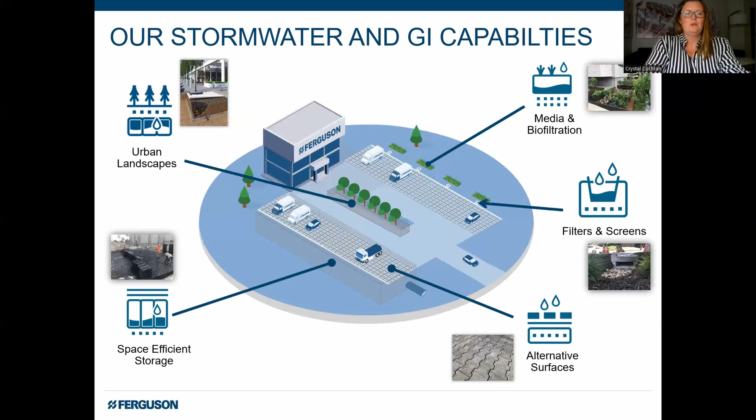And then, of course, a very popular space efficient storage category. My boss asks all the time, where does your rain go? And it's really this weird little question, but if you think about it, all of our stormwater projects essentially are summed up with this question. So we are going to take a look also at space efficient storage and how we can store some rainwater without creating future maintenance issues for us.

My team at Ferguson spends a great deal of time with specifiers from both the private and public sectors. And really, it doesn't matter which side of the table you're sitting on. The very first question that everybody asks is, how much is this project going to cost me? The second question, without fail, what will it take to maintain it? The days of specifying solutions that we can set and forget don't exist anymore. They are long gone. Now, maintenance is an expected part of these projects.

Working with municipalities, contractors, civil engineers, landscape architects, manufacturers, even environmental organizations across the country has really given our team a unique ability to truly learn about the various needs of these different cities and how to meet those needs. And it really does give you a unique perspective on the different BMPs that are out there, the ones that are best suited for which area, geographically.

But then, of course, the answer would change depending on that city's ability to maintain that BMP, right? Some cities have more resources or more tools available to them. And if that's the case, for the cities with less, you would maybe recommend a different green infrastructure BMP so that it could continue to function properly for the life of the project.

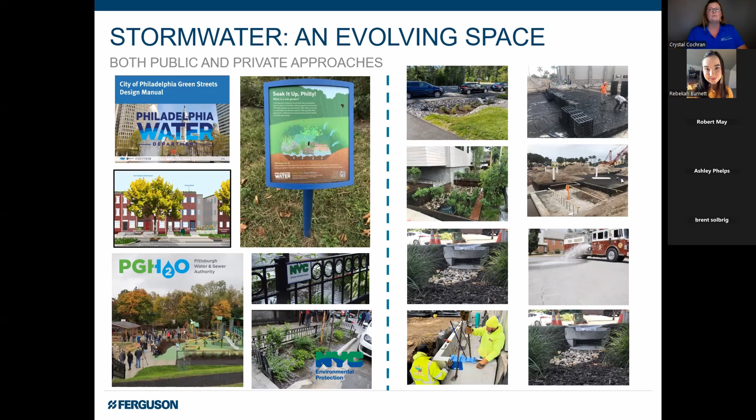It's really important for you guys to lean on your resources. Many companies now, Ferguson included, offer design assistance to you at no cost. When you ask for help with your projects, they're happy to help make recommendations. And I really encourage you to use these services. Not only does it save you a lot of time and money, but it really helps to ensure that somebody that has been out there, that has seen all these projects go in, that has seen the beautiful outcomes, the horror stories and everything in between, learns from those past projects, brings it to the table, and makes your project as successful as possible.

This is usually a lot more than just a, hey, what can I use here? Or a quick email. These are resources that will save a significant amount of time. We're talking sending back not only the proper recommendation, but layouts, CAD details, spec sheets for most of the products. And sometimes it even includes pricing to help make sure your project is in budget.

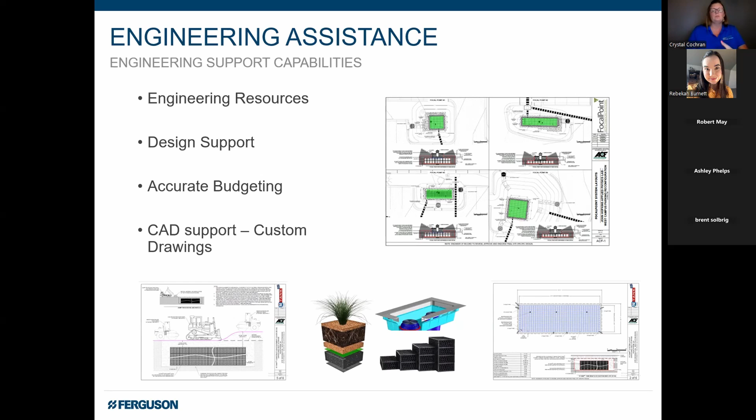So you covered the BMP design, right? Now, what's the most important part? Now you have to make sure that the resources that we're all too happy to help you guys put the BMPs on your plans are going to show up to the job site. Make sure that the lowest bidder on the job doesn't save a few bucks by bringing in dirty stone, or maybe the new guy doesn't forget to install the inspection ports on your subsurface storage system.

Job site support is equally as important as design support. Ask for it, require it. If someone's helping you to specify a product, make sure they're going to help you with the install too. The installation of BMPs, it's a crucial step in the process. Anything installed incorrectly is more than likely going to need to be repaired or replaced really quickly, which is, of course, time and money not very well spent.

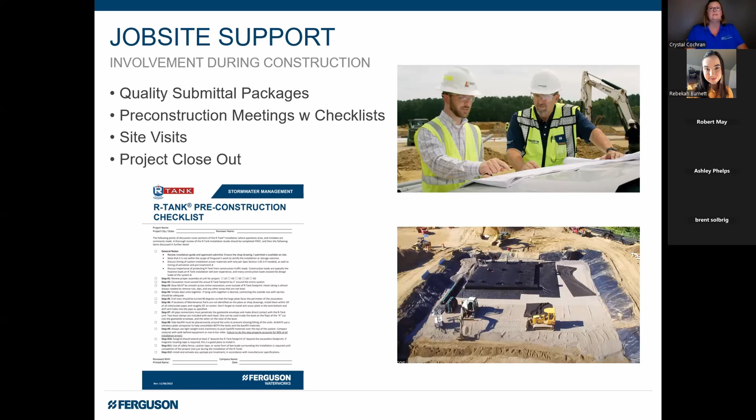Many companies and organizations provide support that's unique to municipalities. Again, Ferguson is included in that. Sometimes this looks like helping your team design a new GI project, every year we're going to design something new to help our city meet their green infrastructure goals. We would love to help with that. There's a lot of organizations out there right now that would love to help make sure you're implementing the right assets for your goals. Other times it's collaborating on an already existing green stormwater project.

Maybe it's not performing as well as you'd hoped. And again, many of your local stormwater solutions providers can really help take a lot of that burden off of you, save a lot of Google time, right? Reach out to them and allow them to assist you.

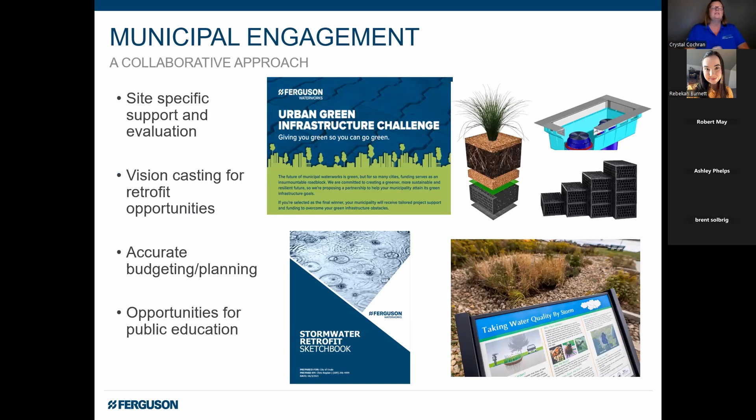Green stormwater infrastructure is a phrase that we're hearing a lot more often all over the country, some states more than others, but just the same, everybody is at least aware that it exists. This is so much more today than just a pocket of green people, right? It is not just like me hugging a tree and saving a turtle and not letting my kids use straws. This is more than that. This is a way where we are designing as naturally as possible. We're allowing developers to build that new shopping mall without directing more untreated stormwater to your drains. Maybe instead you're refilling an aquifer a little bit quicker.

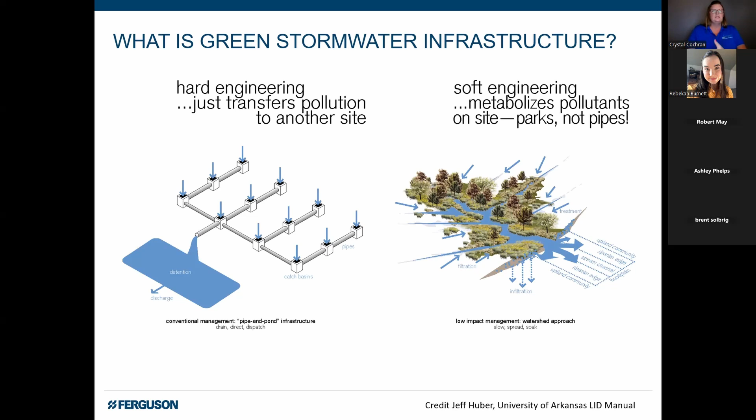So now that you start to see a need for green infrastructure, and some even have requirements, right? I know a lot of cities across the country have actual requirements for a lot of these things. You start to hear all the naysayers, right? Why is this a bad idea? People on your design team, the owners, the city you're building in, whoever, they're going to start to list the many, many reasons why green infrastructure is such a bad idea that you should be scared, right?

There's always going to be the concern that the project's going to cost too much. The repairs are going to be too expensive. This is going to be a concern no matter what you're designing. It does not matter if it incorporates GI solutions or not, but the maintenance aspect of it, of course, brings its own unique challenges. Many people worry that these BMPs will be too difficult or expensive to maintain, rendering them virtually ineffective in the long run.

I have terrible news for every person in attendance right now. No matter what you do, it is going to cost money. And every single thing that you implement is going to need to be maintained. I don't care what it is, right? So with the right experience and keeping maintenance in mind, you can absolutely create an effective design that will provide stormwater solutions with BMPs that will be simple to maintain, and not just by people that have been using green infrastructure for a long time, but by even inexperienced maintenance crews and the people with limited equipment.

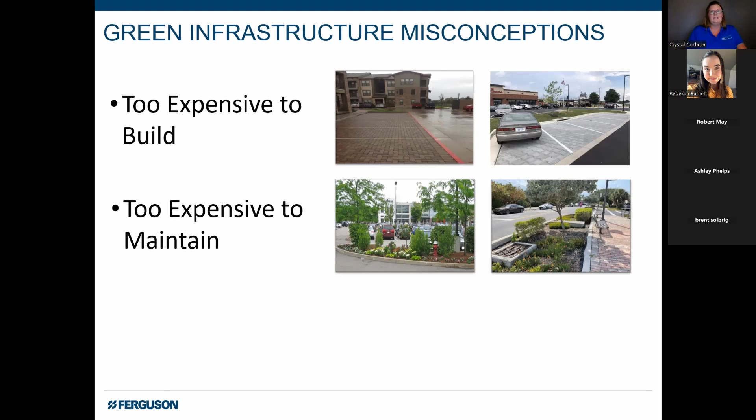This is one of the reasons why green infrastructure is so important. If you're in an area with less development, then only about 10% of your stormwater is running off. That is a much more manageable number. It leads to cleaner water, cooler temperatures. It has a lot fewer problems related to their stormwater.

But if you're in an area that's more developed, like a lot of us, right? Like I live in San Antonio, the people that are living in Houston, Dallas, New York, whatever. If you're in a heavily developed urban area, about 55% of your stormwater is running off. This increase, it's a substantial difference in the stormwater solutions that you're needing to provide. It makes the focus on stormwater in your space a much more serious conversation. At this point, you're not just looking at flooding, which is already important, but you're focusing on the many issues that we see that come along with the runoff.

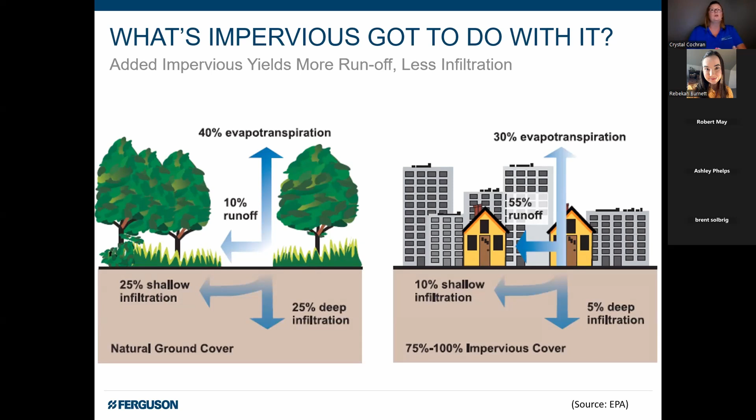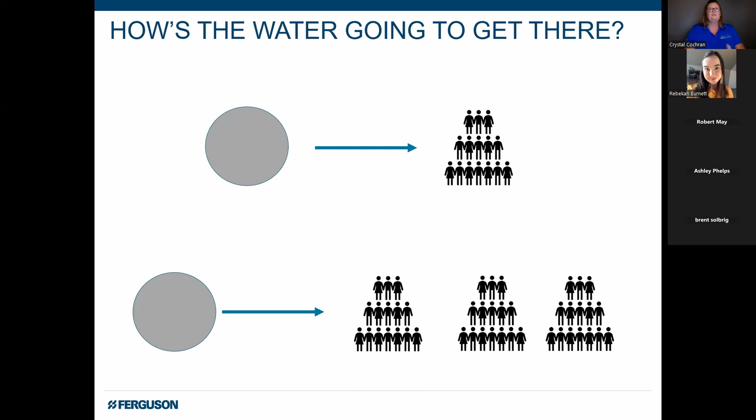We work on projects all the time that had one small area of development and infrastructure, and that space was designed to work for areas that were whatever the population was expected to be at that time, right? Many years and a lot of growth later, the systems in our more heavily populated areas are maxed out. This creates a further need to focus on green stormwater solutions, especially in these spaces.

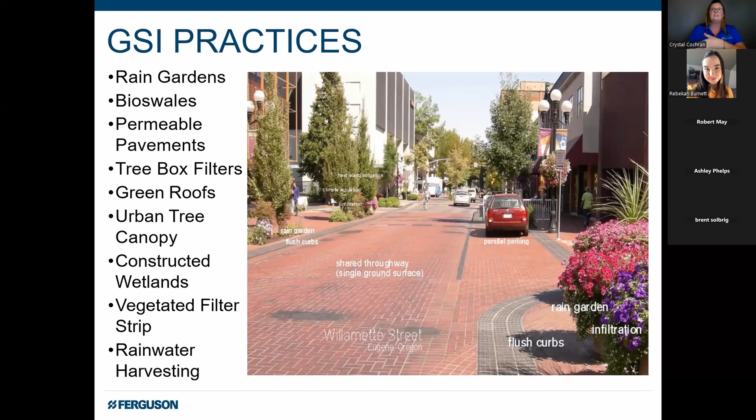Fortunately, by incorporating some of these green stormwater infrastructure BMPs, which are commonly associated with stormwater projects across the country, you are able to help mitigate some of these issues, right? Many of these have been implemented nationwide for years now. This allows specifiers, manufacturers, and municipalities to learn what works best in each of their respective spaces, and it also gives you an idea of what it takes to maintain these solutions in the long term.

When it comes to designing any project, everybody's needs are a little bit different. The municipality's focus is, of course, a little different than, let's say, the developer's. Municipalities are worried about mitigating flooding first and foremost. When storms in any given city are severe enough to cause damage to local businesses, residences, and existing infrastructure, it creates substantial losses for a multitude of people. So flooding is always, thankfully, a top priority for municipalities, counties, and parishes.

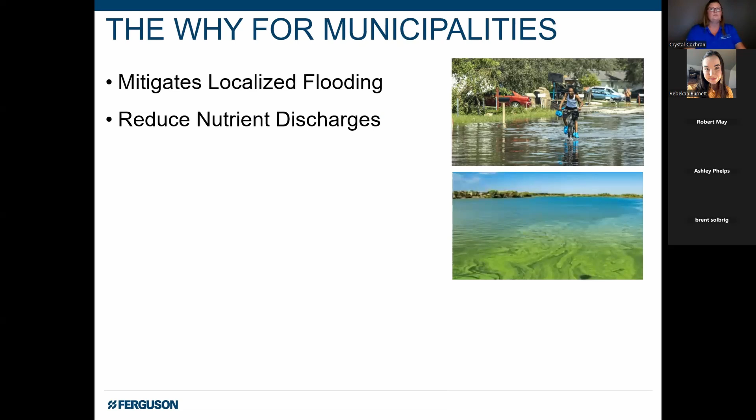Reducing nutrients and other pollutants in the water has become an increasing goal for a lot of the municipalities we work with. Another area where mainly municipalities are concerned is recharging the aquifers. Keeping stormwater on site solves many challenges associated with runoff, including ensuring that our town has water to use in the coming months. In addition, for the areas focusing on treating stormwater, implementing GSI solutions means that you are able to remove a lot of those pollutants on site instead of sending them down to be treated or worried about later.

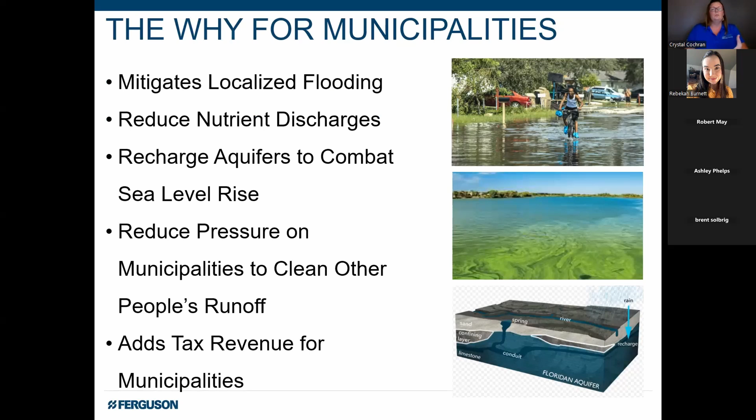Another reason the municipality's focus is a little different than a developer's is that when you're able to use that land for something more than stormwater detention, it's going to add tax revenue for the city, right? Let's put up a school, a park, a dog park, a grocery store, whatever it is, that's better than a detention pond.

The private developer is looking to find ways to meet the requirements of the city they're in without spending any money that's not absolutely necessary. A lot of cities now are offering GSI credits for developers, and they're looking to capitalize on that, right? What incentives can they get to develop in your space? They're trying to do the best they can with the sites that are available to them, and sometimes that means really unfavorable conditions.

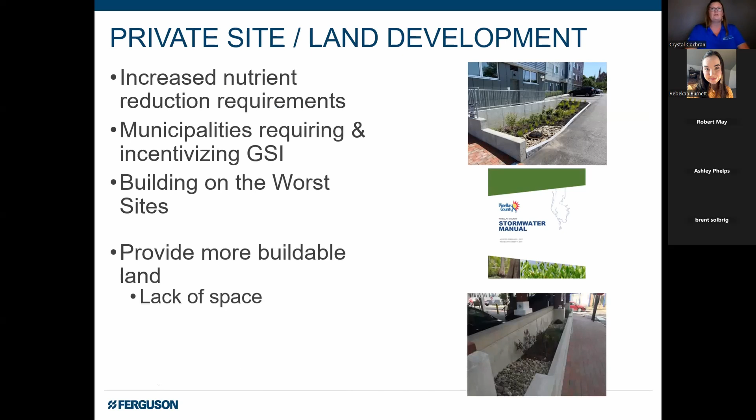And public perception matters to the developer, right? They want people to buy their product, their apartment complex, whatever it is. People want to live in areas that are well kept, that are beautiful, that are not going to flood. And if somewhere in there they're able to care for natural resources as well, it's of course a huge bonus.

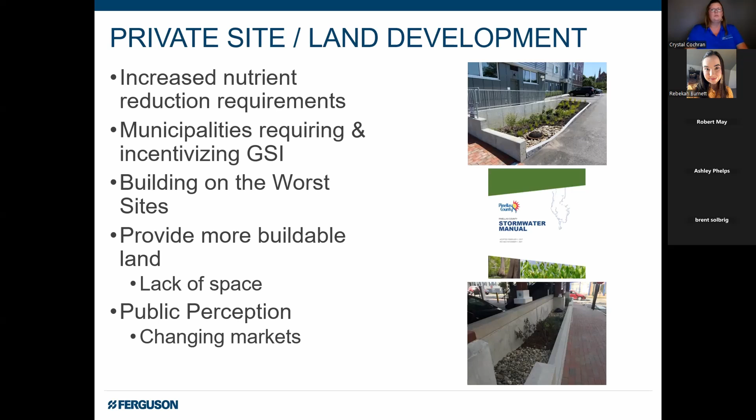Raleigh, North Carolina, and Mount Pleasant, South Carolina are fantastic examples of municipalities that are providing incentives to their local developers. This is in part an effort to take some of the financial burden off of the developer and make it more feasible to incorporate green stormwater infrastructure into the designs in their respective cities. If you help bridge that gap, they're more likely to actually want to build there.

It's really helped to create better public-private partnerships in these spaces. Municipalities implementing these incentive programs have made it less of a "me against you, who is this burden going to fall on," and more of a partnership.

What do these specific stormwater programs have in common? They are some of the best in the country. In working with municipalities nationwide, we've come to realize that a lot of cities have green infrastructure programs, but the ones with the best programs are the ones that realize they need to focus on maintenance. Understanding the need to maintain your GSI asset has made the stormwater programs in these cities and many others very successful. They spend time and money to make their future maintenance as easy and cost effective as possible.

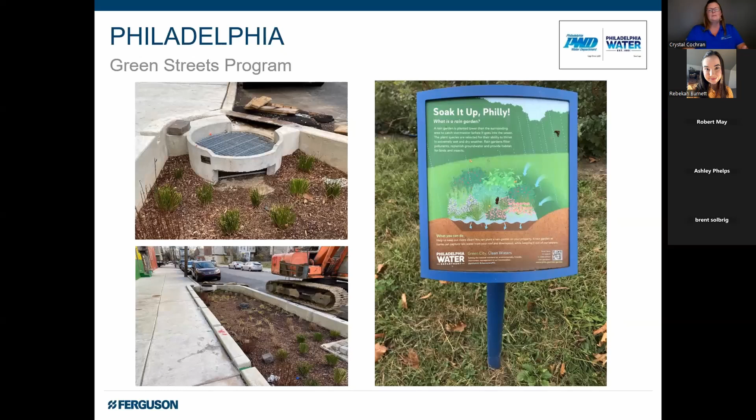First, let's take a look at Philadelphia. In my opinion, Philadelphia has one of the coolest, honestly, and best green streetscape programs in the country. They focus a lot on maintenance and they create a lot of different areas where they're willing to utilize green infrastructure practices, which again is unique, right? Not a lot of heavily populated areas are as on board with that yet.

So why do we think Philadelphia is so successful? They have a variety of green infrastructure solutions in place, including bioretention, permeable surfaces, inlet protection devices. And in addition to this, they're willing, like I said, to allow new and innovative solutions to be implemented. This is rare. Nobody likes to be the guinea pig, so it makes them unique.

Philly has a good understanding of how much these projects cost, and not just to implement the green stormwater infrastructure BMP that they wanted to, but having 15 years of projects in this space gives them a really good idea of how much these solutions actually cost in the long term. How much is it going to cost to maintain them, to repair them, to replace them?

Something else that makes Philadelphia so successful is that they bring together many departments. They don't just count on the person designing the project. They're willing to collaborate on their stormwater plans, their requirements, and their projects. So they get feedback from people that are not just designing the project, but the people that are maintaining them as well. They use this experience, right? The experience in the field is sometimes different than the experience in the office, and it does a really good job of helping to drive their designs.

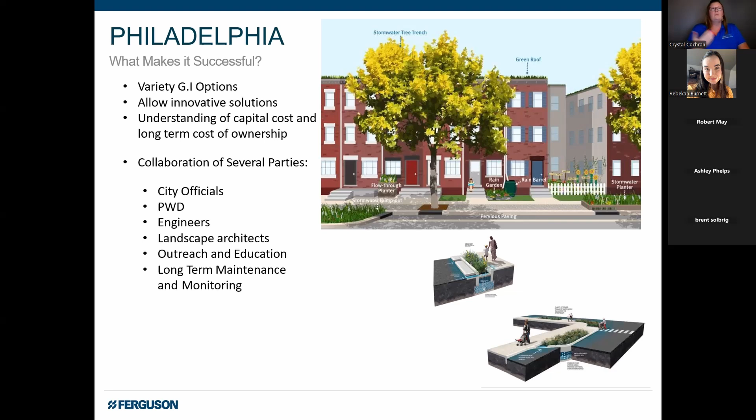One of the projects that we worked with them on was in an effort to improve maintenance needs on their inlet protection. Philly places a lot of importance on inlet protection. So they had all of these filters in their inlets, of course, keeping trash and debris out of what would be their gray and green infrastructure assets. This is a wonderful, simple solution that itself simplifies maintenance related to,

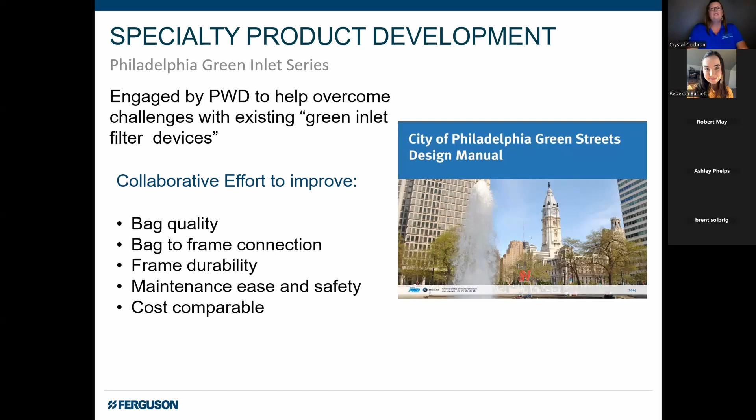They came to us and they said, hey, we're tired of replacing these bags. They want to do something differently. So we collaborated. What can we do to make sure that the geotextiles are a higher quality? They wanted the frames to be able to fit into a variety of inlet sizes. They wanted, of course, the product to be durable. And they wanted it to still, of course, be comparable in cost. Nobody can afford for something to increase significantly, even if you need it to be better, right? And they wanted it to be able to be maintained safely and easily.

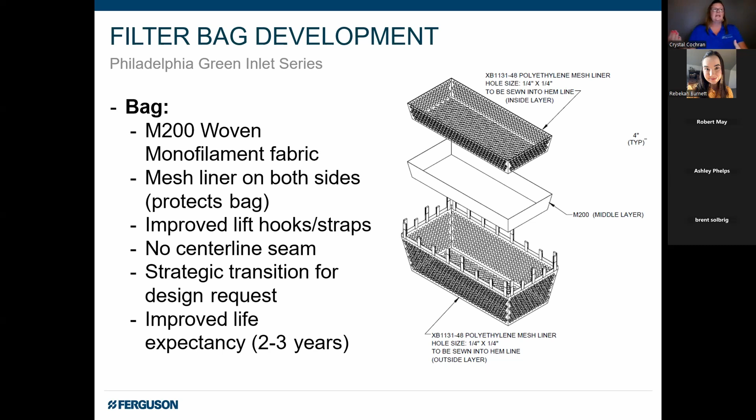The design that we finally came up with was this 3-piece bag set. Now, instead of it being just a filter, it was one single layer of fabric in between 2 layers of a mesh liner. The fabric was now a woven monofilament fabric, and it didn't have a center seam any longer. These really simple changes improved the life expectancy of these inlet protection devices from 1 year to now they were looking at 2 to 3 years. Of course, this saves time and money by extending the life cycle costs associated with this GSI.

This is another Philadelphia project that we were fortunate enough to have been able to collaborate on. Many of their inlets leading to their storm basins are only 1.5 inches high. So they installed all of these bags that were collecting the debris, of course, coming through the inlets, right? The challenge was when you needed to maintain the system.

The crew would go out, they would open up the manhole cover, and they would take out the sack. But as you can see in the design, it's challenging. So when they were trying to remove the sack, they realized they were spilling a lot of the contents that were captured. The maintenance crews were then trying to get stuff out of the catch basin. Obviously, it was a flawed solution, and we needed to come up with something different.

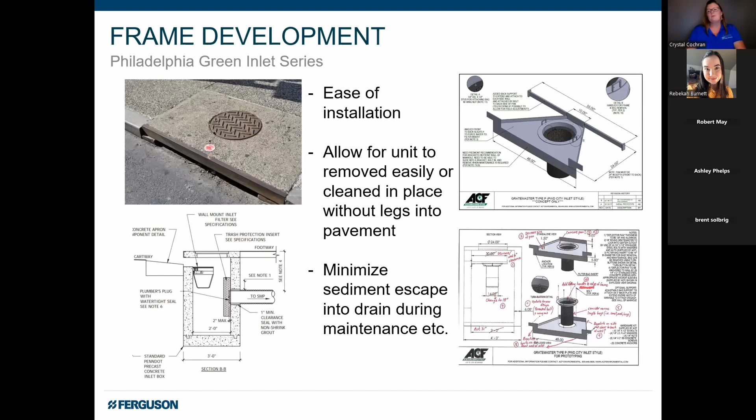So ultimately, what was decided on was this round geotextile bag sat below the manhole. So when the crews came out and they opened up the lid, they could remove the bag easily, empty it, and return it to the mount. This made maintenance on their inlet protection a lot more simple, safe, and effective for them. So it's another way that, of course, was saving money.

Another way that the maintenance really drove the design of this project was that in addition to the filtration being used in a better way so that you could maintain it a little better, the city actually came to us and said, hey, we want this entire sack to be able to capture the smaller particles that are in the stormwater. And the maintenance team was called out to collaborate on this.

And they were like, hey, that's fantastic. But when we go out to empty the sack and it's full of wet sediment, the maintenance is going to be a lot harder, right? We're talking a much heavier sack at this point. So they agreed to compromise.

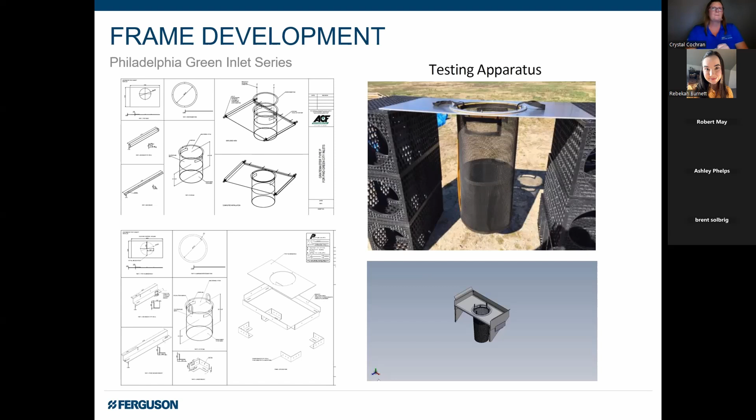This product line actually went on and won an award for excellence in the GSI area in that city. And it's in no small part thanks to the fact that they were willing to collaborate on this product. It made it cost effective, maintainable, and sustainable for the long term for Philadelphia.

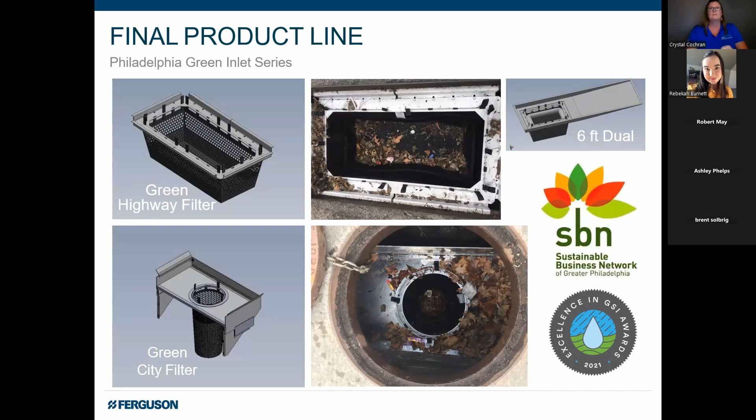Bioretention, rain gardens, bioswales, these are really popular GSI assets. They're usually one of the first solutions considered, right? They're natural, they're affordable. A rain garden is a depressed area in the landscape that collects the rainwater from a roof, driveway, street. It allows it to soak into the ground. Planted usually with flowers, grass, other vegetation. Rain gardens are usually a pretty cost effective, beautiful way to reduce runoff from your property.

The maintenance is simple. It can be a little bit more time consuming, especially after heavy rains or if you live in a heavily populated area. If there's a lot of litter going on in your city, of course, that's going to be a concern. You're going to need to add or replace the vegetation as needed. You're going to need to take care of eroded areas, prune, weed, replace the mulch. Sometimes you're going to need to fertilize.

Bioswales are similar, right? This is a landscape feature that collects polluted stormwater runoff, soaks it into the ground, and filters out pollution on site. It's similar, like I said, to rain gardens, but they're designed to capture much more stormwater runoff, right? Like areas coming off of your parking lot or your driveways, the streets, things like that.

So the maintenance on them, again, relatively simple. Relatively cost effective. Remove the debris that's collected, maybe take care of some erosion in the inlets, remove some weeds or invasive plants, replace the mulch and flowers. Again, relatively simple, fairly cost effective.

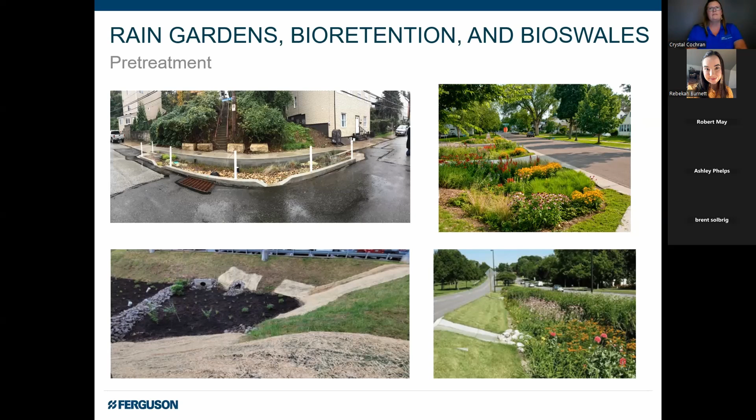Like I said, maintenance on bioretention, as simple as it can be, is a lot less challenging and time consuming if you take the time to design with pre-treatment in mind. Pre-treatment helps collect sediment and debris while keeping it looking amazing. It dissipates energy, and it gives you a lot more time in between needing to replace the mulch and plants on these systems. Plus, it helps to keep them looking beautiful, right?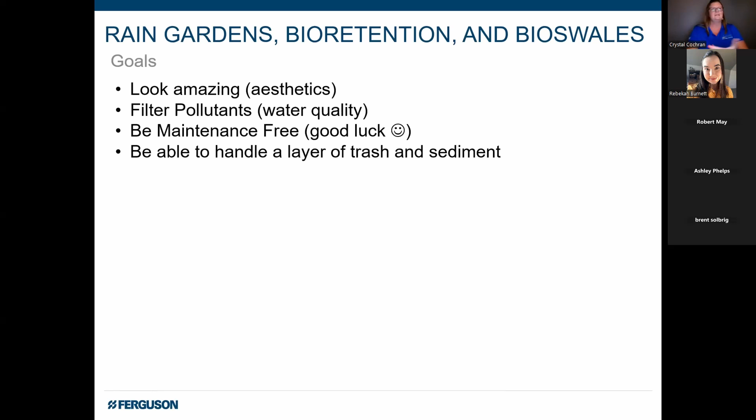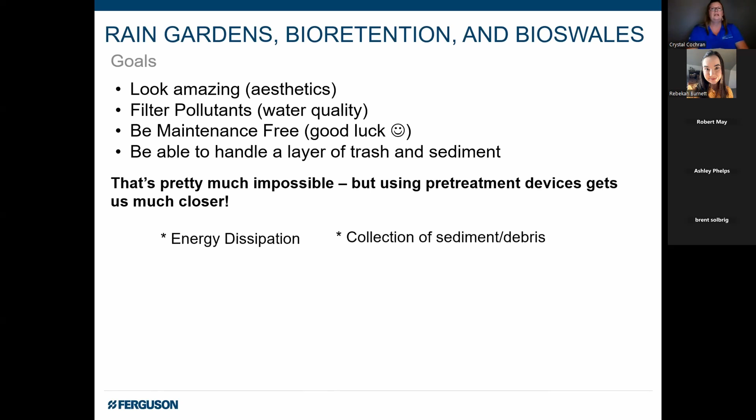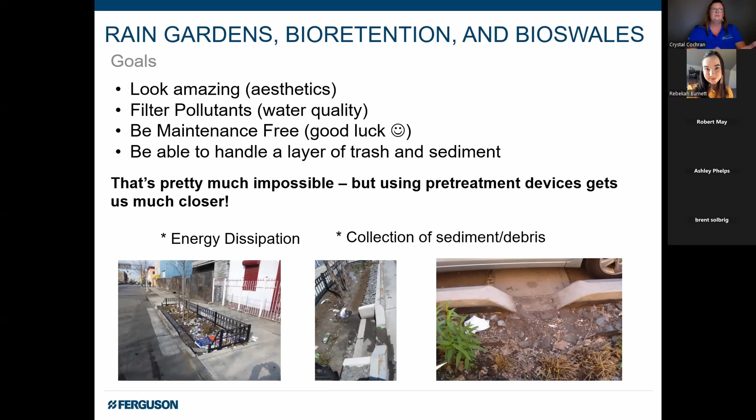Because anytime we're designing something at our curb line, that's the goal. It can't just work anymore. It has to be pretty too. And while nothing is maintenance free, utilizing pre-treatment in any of your designs honestly does keep your GI asset looking good and functioning the way that you intended it to. And it definitely cuts down on your maintenance costs. It's going to prevent your systems from looking something like this. These systems probably are not functioning the way that they were intended to at this point.

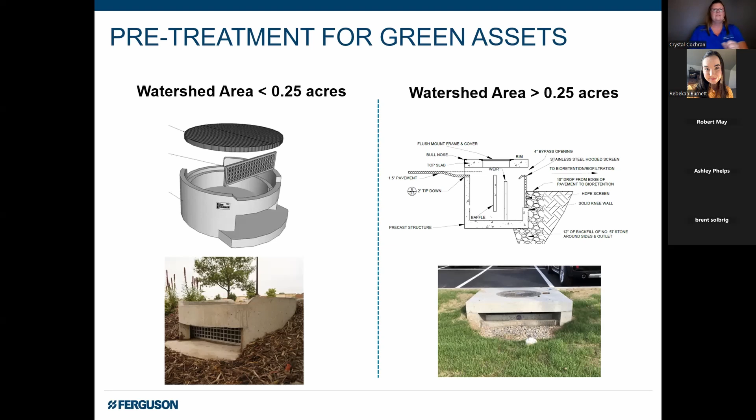Of course, the pre-treatment device that you choose for your green asset is going to depend on a lot of factors, right? No size fits all on any of these projects. The size of the watershed that you're looking at is going to make a difference on the asset that you would choose for these projects. It's going to need to take a layer of trash, sediment, and debris while slowing the flow of the incoming stormwaters so that your rain garden can survive a little longer. I've seen a lot of rain gardens, and I can tell you without a doubt that the ones that have something like this on it look and function much better.

Simple to install options are great for both new builds and retrofit applications. So even if you already have an existing rain garden in place, you can absolutely go back with something like this and still add a pre-treatment device to it to extend your maintenance cycles. Like I said, this is really just a way to keep the feature on your smaller watersheds looking amazing, working properly without creating maintenance nightmares. Systems like this are designed to be maintained by one person, a trash bag, and a shovel. You really cannot get more simple maintenance.

It's as simple as lifting the grate. You clean out the debris from the catch basin, and then, I don't know if you can see, but there's a filter screen usually on the front of them. Spray it off or scrape off the filter screen, replace it. It is significantly less maintenance than replacing mulch, plants, or rehabbing inlets, dealing with erosion issues on your stormwater solution that you had put in place.

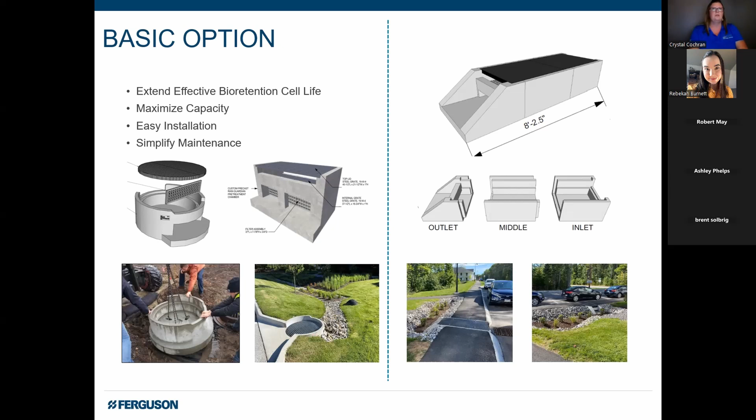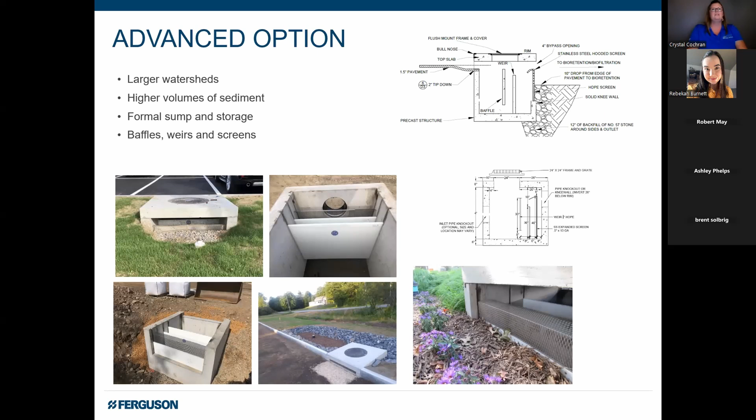If you're treating a larger watershed, there are some more advanced options. The idea is the same, but now it's a formal sump, right? So it still requires one person, very little tools or equipment to maintain, and again, lowers the maintenance costs associated with your GI asset noticeably.

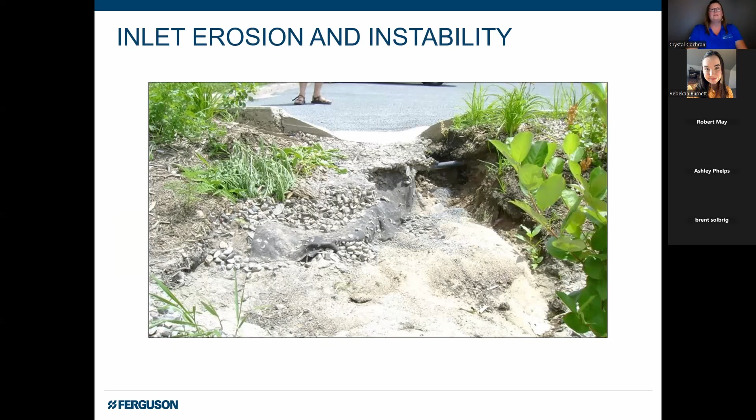This is typically what we start to see if you don't have some sort of pre-treatment device on these projects. Inlet erosion almost always, and of course, instability. This is going to cost quite a bit more to come in and repair or maintain than something like this. Again, a pre-treatment device saves a lot of time and money. So if you're designing some sort of a rain garden, bioswale, something like that on your projects, I would urge you to consider some sort of pre-treatment device to make maintenance much more palatable.

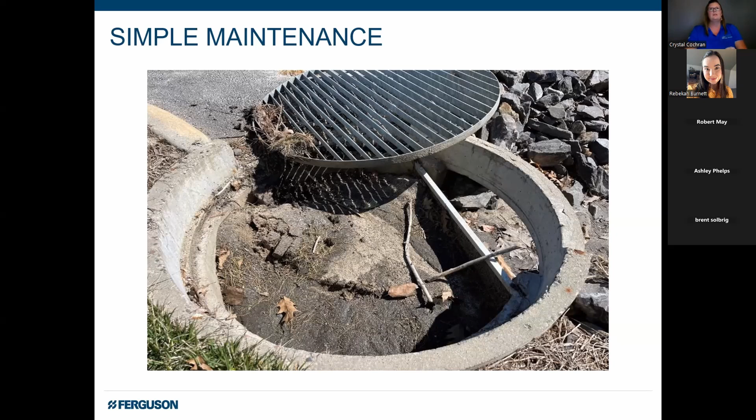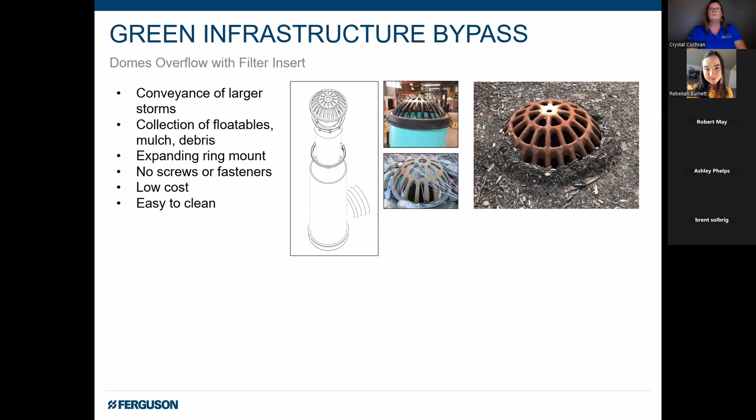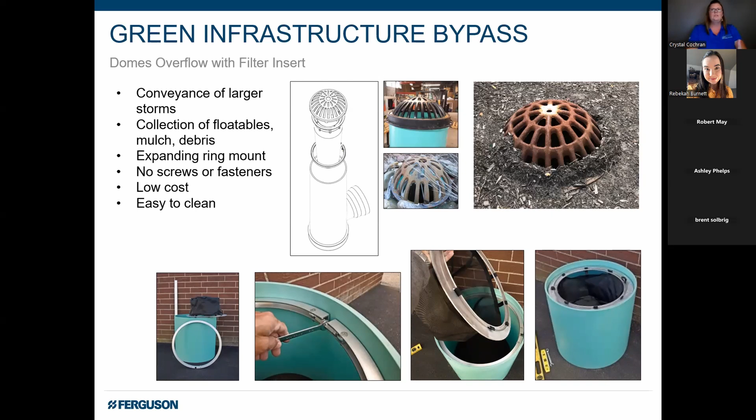Bypass is really typical in rain garden or other GI solutions. Of course, you need to make sure that in large storm events, you're able to get into the conveyance system at a much faster rate. In order to allow water through quickly, usually the holes in the grate are pretty large, right? So even just the very simple addition of something like this, a very cost-effective filter bag insert into the green infrastructure bypass, really does a fantastic job of collecting a lot of the little particles and debris that would otherwise have worked its way down into your system. Again, really simple maintenance: remove the lid, empty the bag, put it back, replace the lid.

A lot of major cities, including New York City, like to put out rain gardens in their right-of-way spaces. A lot of us are out of space, right? And we're trying to finagle things in anywhere we can fit it. Anywhere where there's a place we can put a little rain garden or add some sort of media or add a permeable surface. So we're looking at doing them in our stormwater projects now. You can see here in this bottom photo, this is not functioning properly. It does not have pre-treatment on it, and it's obviously clogged.

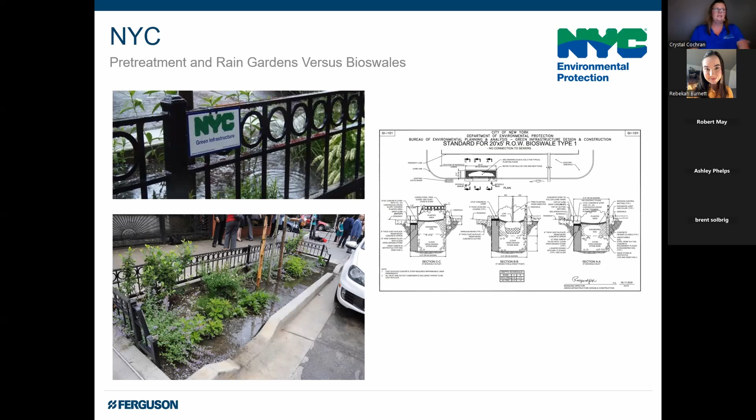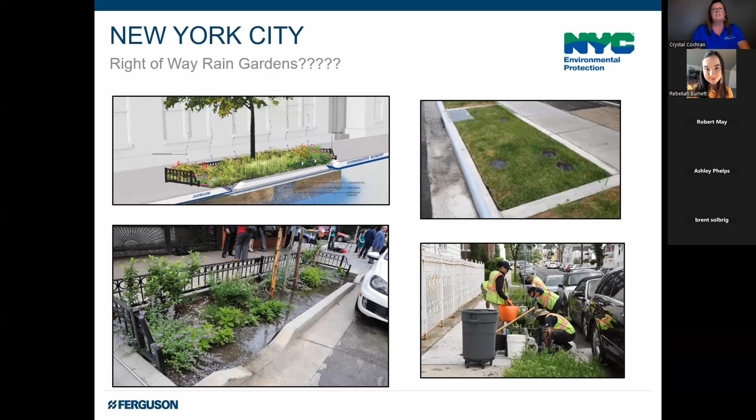New York City is no different. Like I said, they wanted to implement these gravel pits. They came and said, hey, what can we do to make them function properly with the simplest maintenance humanly possible? So we recommended, of course, there be a filter placed at the inlet at the end. And again, maintenance is really simple. A guy comes out, they can empty these inlet protections and then put it back. Again, maintenance is completed very quickly.

One maintenance crew on this project was able to maintain like 50 to 75 assets a month. So then, of course, they needed more crews, more trucks to get the crews around, right? So like 10 crews later, they realized they were in over their head and kind of upside down on maintenance. So they started looking for other solutions. When they're comparing other options, they're comparing them to the rain gardens, right? We need the same effect with the least maintenance possible.

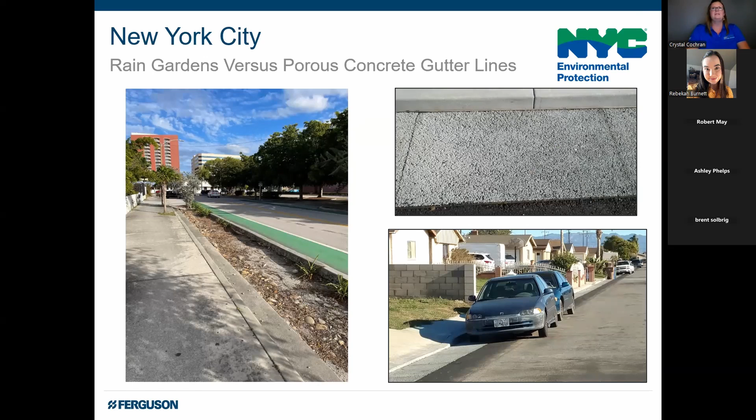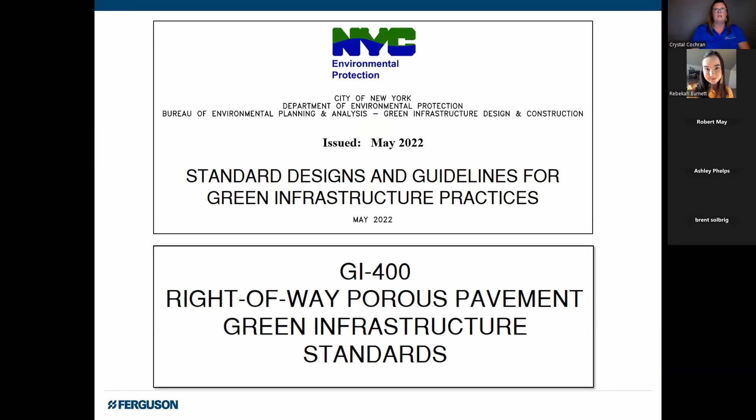So they decided, we have to figure out a way to make maintenance more palatable, reduce the cost of maintenance, but still use a green infrastructure asset. They came up with this innovative porous gutter line application. You can see it here. Ultimately, they converted their gutter lines from conventional gutters with inlets, sending stormwater into pipes, allowing them to intercept rainfall in the gutter line.

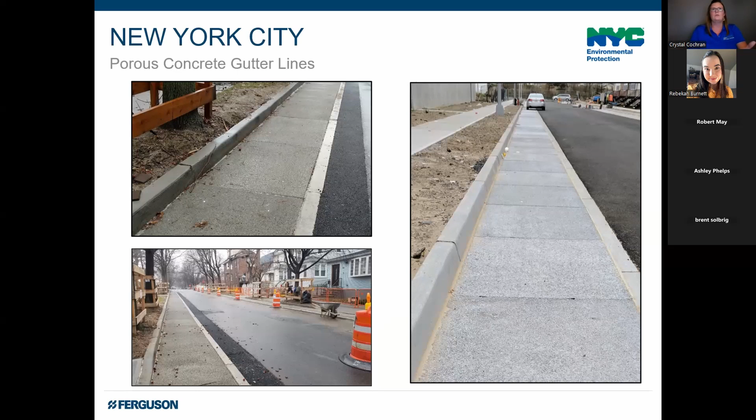This really gave them a chance not just to implement a green infrastructure asset, but it helped to mitigate flooding, right? They are taking some of the strain off of their already largely taxed sewer systems. If you can keep and treat some stormwater on site, it's saving us money in the long run. This was a fantastic way for them to do that.

The cross section is a system that they designed. They used precast porous concrete panels, again, using an advancement in technology to their advantage. This really helped to keep maintenance in mind. They used precast porous concrete panels instead of pour in place. So if something broke, or something was going on at that site where you needed to take out a panel, you can easily take out the panel. And that's a lot easier to replace than cutting, patching, repairing pour in place porous concrete on site.

Most of the specs for porous concrete, at the very least, you're talking having to cure 14 days. That's not ideal for any of our projects in any city I've ever been in. So if you can replace it with a precast panel that's ready to go that you can drive on immediately, obviously that's going to save a lot of time on maintenance. Using these panels, they also cut down on the install time, significantly reducing the amount of time the roadways were closed.

Local businesses aren't affected as long, and that's a big deal. I live in an area where right now there's a lot of construction going on. And I eat at restaurants often that are like, oh, we're going out of business because there's been construction in front of our restaurant for so long that we can't keep up. Nobody wants to come here. That's avoidable. Let's just design with that in mind.

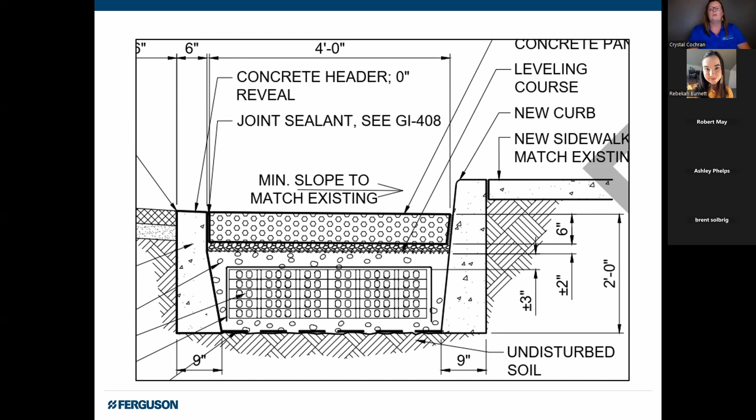In addition to the porous gutter lines, New York City decided to increase the volume. Like I said, they were looking to mitigate flooding as well. So by adding the subsurface storage system that's under the precast panel, they were able to essentially double the storage capacity for the site. So now you're providing a stormwater benefit in multiple ways. Maintenance absolutely drove the decision to install the system rather than to continue with the rain garden plan.

In order to maintain these gutter lines, really, you just need a vac truck. So now you're talking like one guy with a vac truck driving around cleaning these panels in the gutters rather than like 10 crews and 10 trucks driving around all over New York City cleaning up the rain gardens.

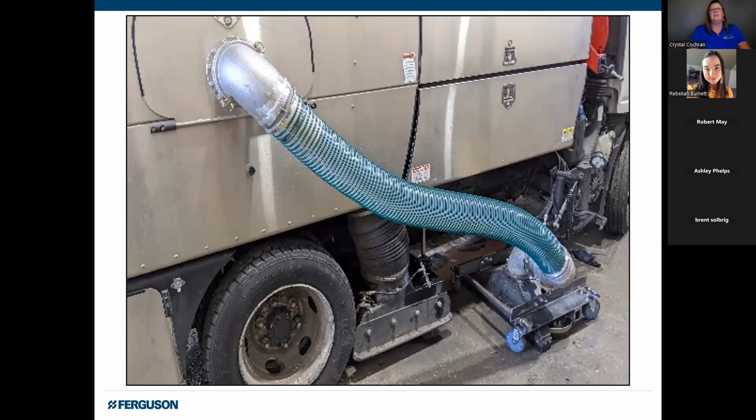Precast porous concrete panels, like I said, come to the site already ready to be installed, right? So one of the greatest things about the panels is sometimes maintenance isn't just about the product itself. What if you need to maintain the area beneath the panels? If you're using a precast porous concrete panel, again, you can just lift it, take care of it. Maybe there's a pipe underneath that needs to be repaired or replaced. You'd be able to conduct your business, put the panel back and go on about your day, which again is a lot easier than some of the other solutions that you would look at for this space.

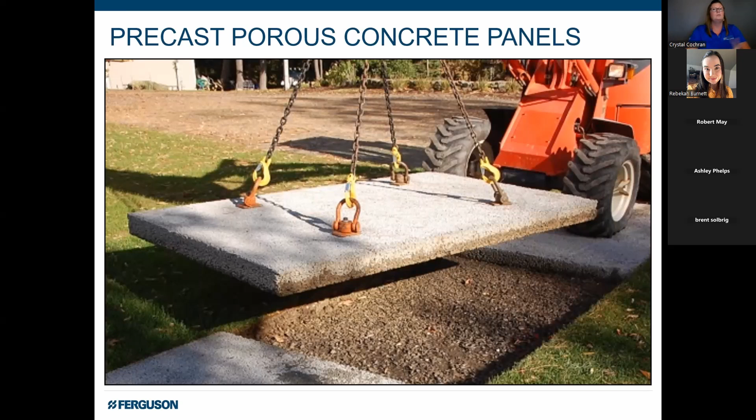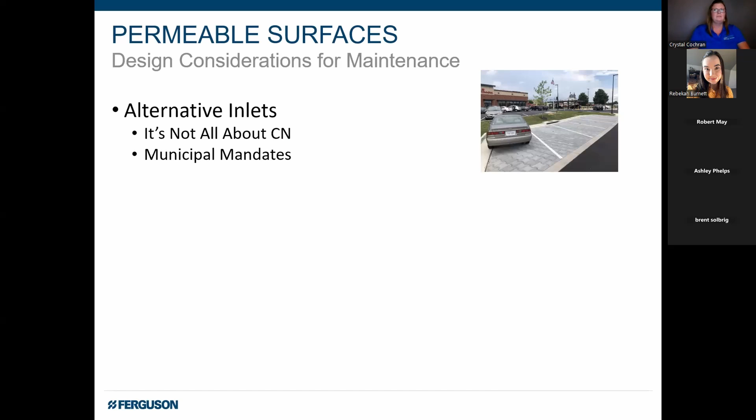As with any GI practice, maintenance really needs to be considered largely when you're designing with a permeable surface. Sometimes I see specifiers incorporate permeables in an effort to check that box, right? Like, okay, we have the amount of pervious cover needed for the site. It's time to move along with my day. Why not make it work for you? Many times we use alternative surfaces as an alternative to traditional inlets. This helps to keep untreated stormwater from entering our pipes and ending up in the local lakes, the rivers, the bays, what have you, right?

When you design with permeables, put them in places where you can direct the runoff to them. There's no need to create an entire permeable parking lot. You can usually move the same amount of stormwater with a fraction of the area. Make sure you're keeping the run-on ratios in mind. If you're directing a large amount of stormwater to that area, you're going to need to maintain it probably more frequently, right? So sometimes reducing the run-on ratio even slightly is going to cut down on the maintenance cost by extending the cycle even slightly.

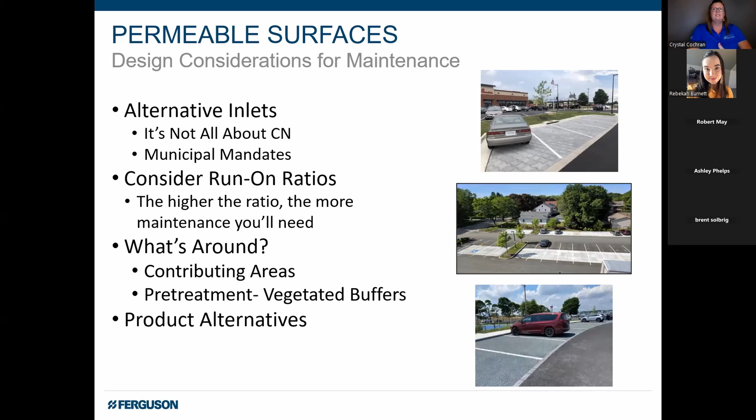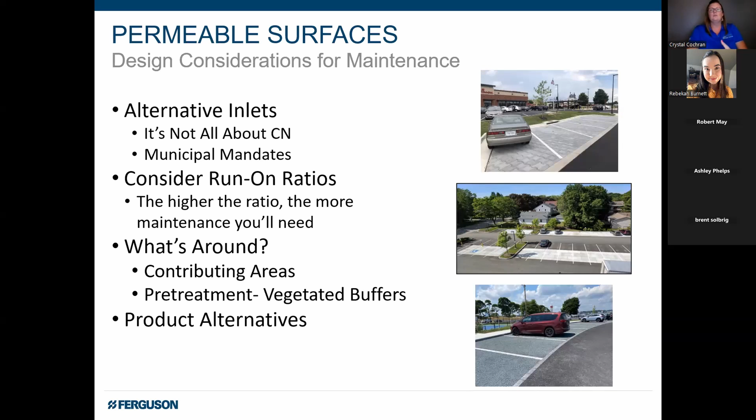When you're designing with permeables, consider what's around your site. If you're able to add some vegetation around the permeable area, it's going to significantly cut down on the amount of sediment, debris, trash, little pieces of mulch, whatever, that are going to reach your permeable surface. Again, of course, eliminating the need for maintenance as frequently. Consider product alternatives. Sometimes there's a better solution for your space than the one that you were maybe considering. There's quite a few products out there now. So it definitely helps to know about them all and pay attention to what you're specifying for each project.

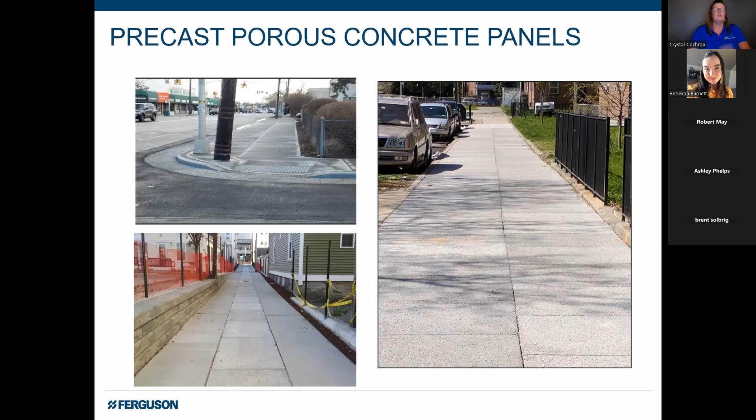There's a lot of different ways to use porous concrete. I've worked on projects where it's in alleyways, gutter lines, even bike paths and things like that. If you can design using porous concrete or precast porous concrete panels, you're really going to cut down on a lot of the maintenance costs. And like I said, a lot of times you can just direct your stormwater to some of those areas rather than having a really large area that you're utilizing it for.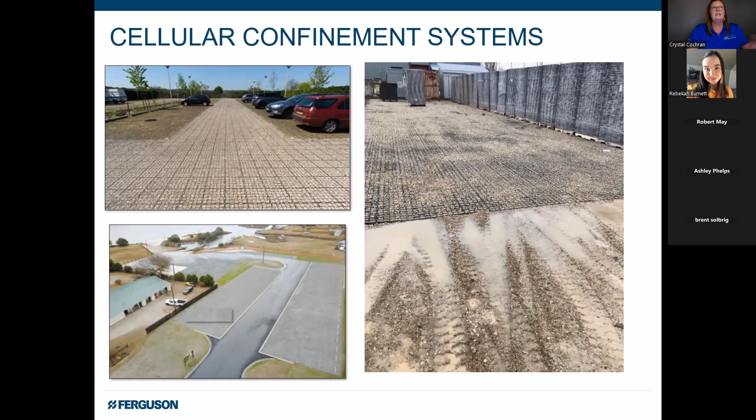This is a project where they were using this parking lot at a boat ramp, and you can see, years later, where the line is where they were using the cellular confinement and not. They're not having to deal with the rutting, ponding, uneven areas, potholes, any of that. And in addition to that, they're of course getting the added stormwater benefit of conveyance and detention. So I highly recommend cellular confinement systems if you're looking at designing with a non-formal surface. They support traffic load ratings. They're ADA compliant. You're able to use them in a lot of areas where you don't need concrete or a formal paver.

A lot of times it's at the fraction of the cost. So on the front end of your project, usually you're saving money. But again, little to no maintenance is a huge deal. Knowing that you're not going to have to maintain it for years to come, that's definitely a savings.

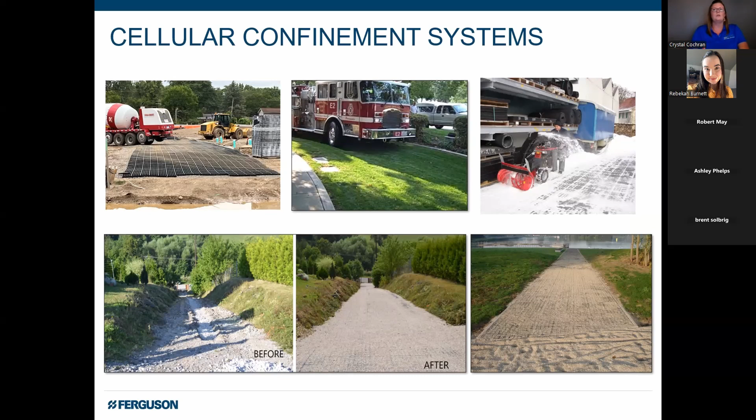Fire lanes, walking paths, overflow parking, lay down yards. They're just some of the areas I really see products like this utilized really successfully. Various types of fill are used in them, like I said, grass or gravel, and it's more affordable than other products. Again, very, very little maintenance.

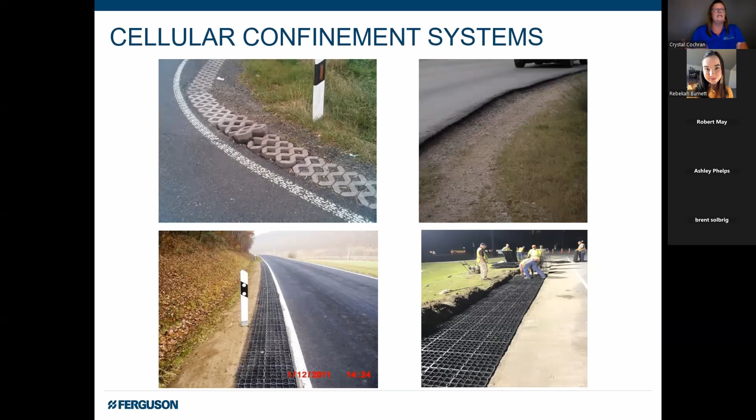Open joint permeable paver systems. These are really popular options in the permeable space. A lot of that is because of maintenance. The pavers themselves, they're rather large. They have notches on the sides that keep a 1/4 inch gap. This eliminates the need for fill, but in addition to that, it locks the system together, creating a monolithic structure, right? So it allows for some movement without the separation, again, reducing the need for so much future maintenance.

Because open joint permeable paver systems are meant to support traffic loads, you see them often used in parking stalls, on parking lots, or in on-street parking. Many times, again, they're designed to act as inlets, right? Cutting down on the need for traditional inlets. Of course, that's again cutting down on maintenance, right? If you don't have inlets and you're not having to protect those inlets, you don't have stormwater flowing through the inlets, you're not having to worry about the debris that's in that stormwater that would have gone through your inlets.

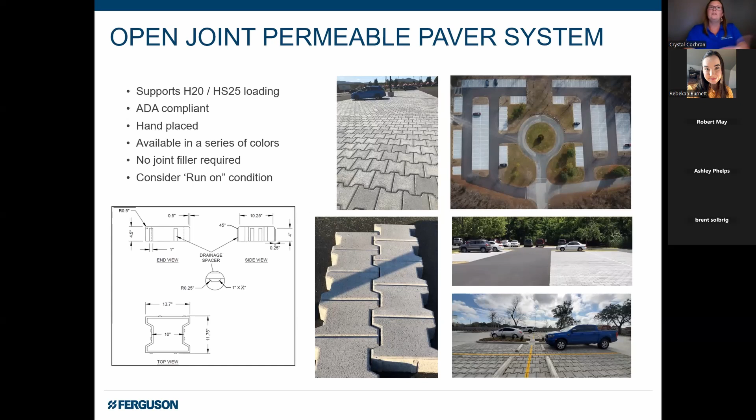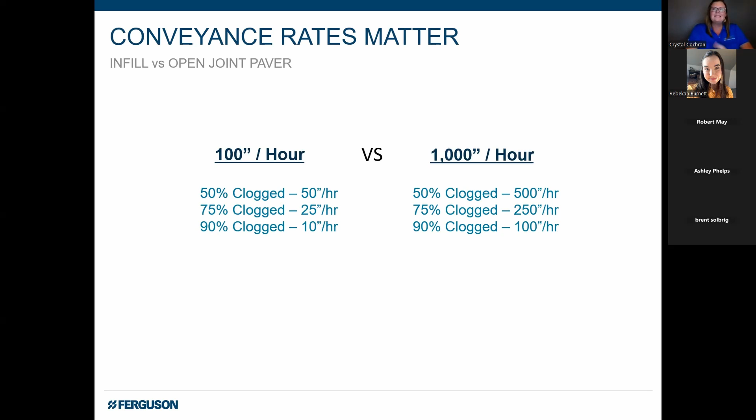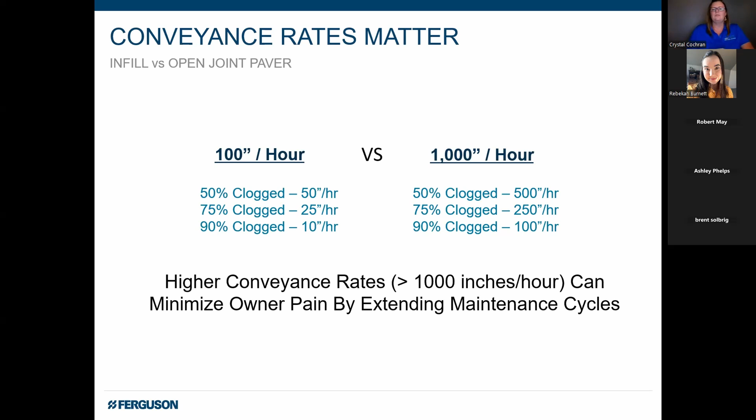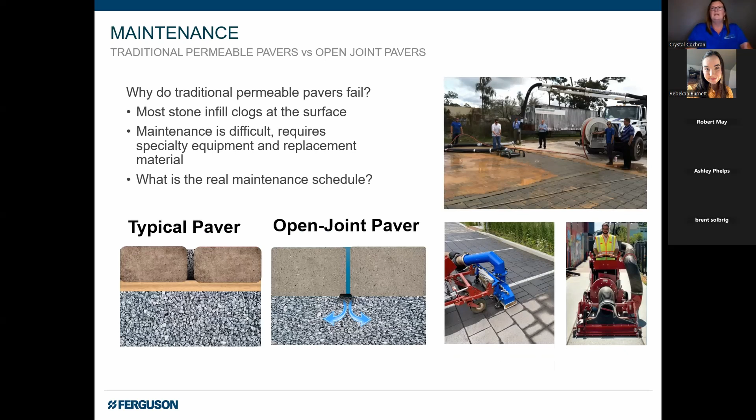Drawdown tests on open joint permeable paver systems, they are amazing. They show that they infiltrate at like 1,000 inches an hour, which is kind of insane. But obviously, it means you have more time before you're having to worry about maintenance, right? If you're maintaining a filled paver and they come out, like I said, with a vac truck, of course, you're going to have to go in and replace the fill as well, right? So that's more time, that's more money. So again, if you're looking at something like this, I really highly recommend you use a non-filled permeable paver system. Again, just to cut down on the amount of money you're going to have to spend on maintenance in the future.

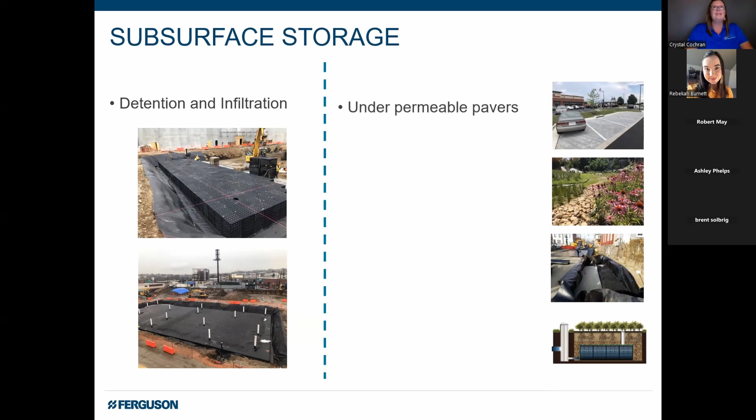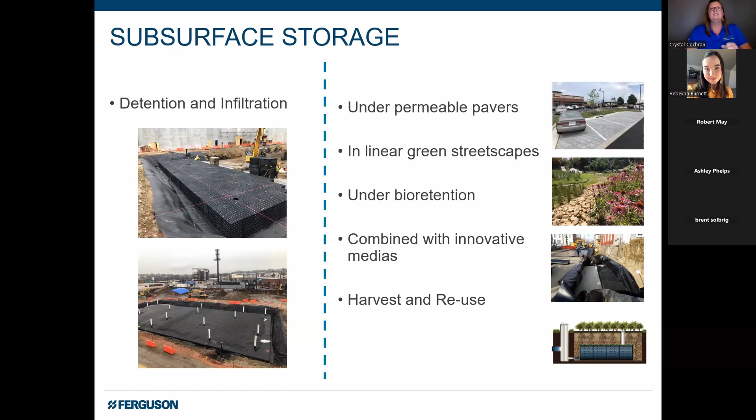Subsurface storage systems are really popular now. Like I said, a lot of times we're trying to use our spaces, right? We do not want to give any more of them to the detention ponds. Traditionally, I see most subsurface systems used for detention and infiltration, but I see them under permeable pavers, in green streetscape projects, under bioretention, combined with some of the cool medias we talked about earlier. And then for harvest and reuse, like if you live in an area like mine where it never rains and you're kicking scorpions off your porch at night, harvest and reuse is a fantastic option for that space. So you see subsurface systems used pretty frequently in all of these applications.

And just like with anything else, if you're installing something, you need to make sure it can be maintained. So if you're looking at a subsurface storage system, that's no different. Make sure you're specifying a system that has inspection ports, so that you can see when the system's ready to be maintained. It also needs to have maintenance modules. How are you maintaining the subsurface system?

So, not only are you, I think, limiting the maintenance that's needed by using a subsurface system, right? It's probably going to need a lot less maintenance below the surface with the addition of pre-treatment at the inlet and it being underground rather than like a detention pond. But now, if you implement something that has a place where maintenance is readily available to the people maintaining it, it is a much easier, cost-effective way to take care of your detention systems.

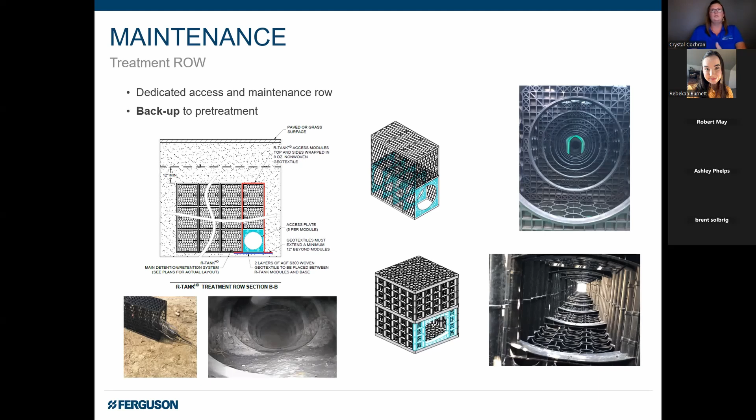Nothing is one size fits all. We kind of touched on this earlier. Every city is a little different. Take a look at your designs. What's your site look like? What space are you working in? What are the pollutants in that area that you're worried about? Everything. Are there hills? Are there mountains? Is it flat? Is there a beach? All of these things matter to your project. So nothing is a one size fits all. That's why it's so important to lean on your local resources and ask for input in these projects.

Other things to consider, of course, maintenance, budget, right? If you can't afford the project, you have a problem, but there's probably a solution that you can afford. Again, reach out to the experts in that space, ask them what's available for that area. Equipment is a big deal. You want to make sure before you do recommend a project that they're able to actually maintain it, that they have the equipment available to them.

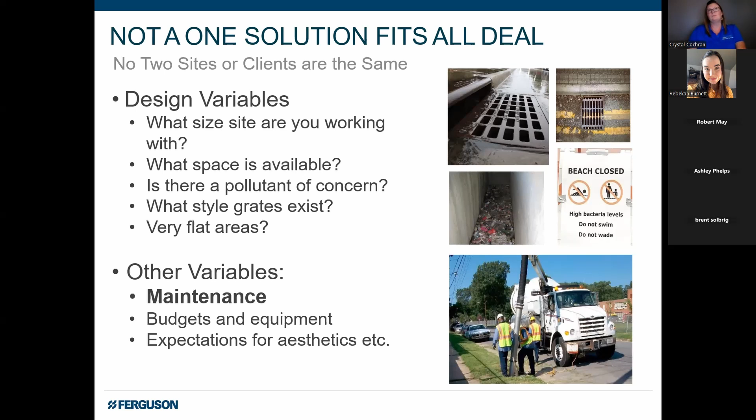And then, of course, expectations are a big deal. Like I said, there's enough products out there where you don't need to specify something that just works. You have the ability now to specify something that works and is beautiful, right? It needs to look good too. So keep those things in mind.

And then, of course, for final thoughts, design with maintenance in mind. I really strongly encourage you guys to do that. It would not only take some of the bad press off of green stormwater infrastructure solutions, but it'll make everyone's life a lot easier moving forward. Pre-treatment is the best, fastest, cheapest way to do that. There's a ton of pre-treatment devices out there. Again, ask your local experts to help you guys implement the solution that's best for you.

And collaboration is absolutely key. There are cities out there, there are other departments out there that have already implemented something similar, and they can tell you what has worked, what hasn't, and give you guys a lot of input that will help you make your life much simpler.